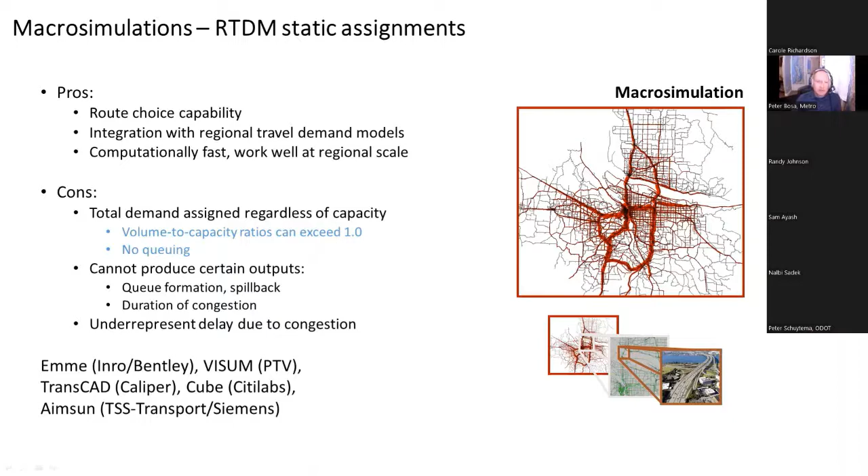I have a list of some of the common tools that are static assignments. At the other end of the spectrum, you have your micro simulations. These are very precise, highly detailed computer simulations. Often the vehicles are almost like agents - they're being modeled individually. They can be assigned specific driver behavior, and they're being simulated in almost real time, so very small fractions, sometimes even sub-second.

They're very time consuming to develop and calibrate. They take a lot of time in order to make sure they're functioning properly. They're computationally very intensive because you're modeling many more single individual objects. The vehicle paths are often fixed - not always, but the traditional application is you get a set of vehicle paths from something like a macro assignment, and then those paths are fed into the micro simulation, turned into individual vehicles, and then it's left up to the operator to determine how to deal with situations in which the demand coming out of your macro assignment might far exceed the capacity capabilities of your facility.

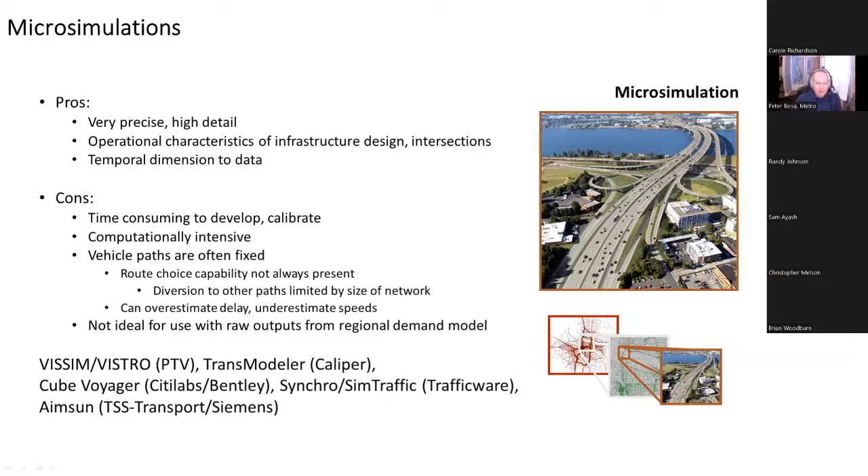So they can sometimes overestimate the amount of congestion on a facility because there's not really that release valve of alternative routes to look at. I'm speaking in generalities here - I know that Chayton would probably raise his hand and say, oh wait, our tool has ways around that, but this is just kind of in general. Then you have this sweet spot, the Goldilocks spot, the meso simulations - dynamic traffic assignment.

There are macro level, macro scale traffic assignments, DTAs. There's some that act more like a micro simulation, but we kind of just group DTA in with this meso simulation description where you're modeling large areas similar to the macro assignments, but you're simulating individual vehicles. There's even some generic behavior associated with some of those vehicles. They're capacity constrained, so you're never going to get a V/C over 1. They do a great job of identifying bottleneck locations and the queues associated with those bottlenecks.

In general, they give us the opportunity to evaluate operational characteristics at a much larger scale than we're used to, operational characteristics of your highway system.

Below is just a list of some of the products that are out there. We've been using Dynameq quite extensively in our region, but I've used all of these other tools listed below, and they all have their advantages. This isn't by any means a judgment call, it's just that we use Dynameq in our region.

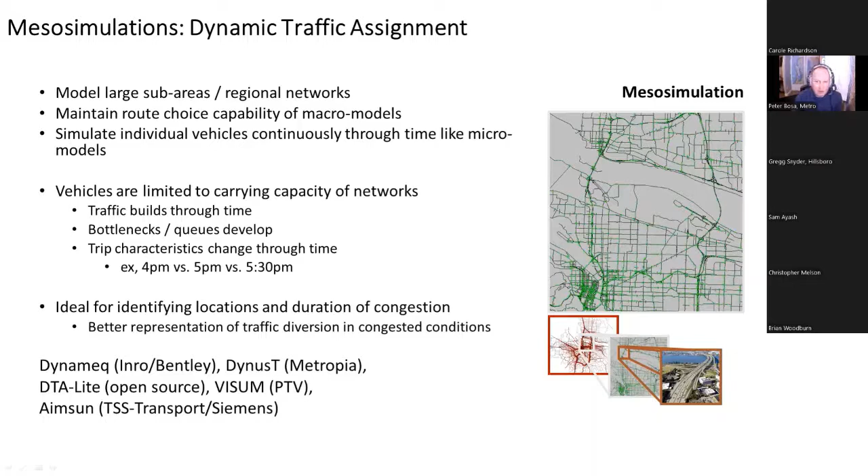We've been actively engaged in DTA development here at Metro for over a decade, since 2010 is when we really got going. We spent a lot of time and resources developing networks, actually all the way down to the lane and intersection level. So when we developed our first networks, we were adamant about getting turn pockets correct, turning movements for lane-to-lane turning movements in intersections, the length of turn bays, as much detail as we could possibly get into our large regional networks. Part of this was because there had been this promise for DTA out there for a long time. It's a tool we've wanted to use.

Unfortunately, until the last maybe 4 or 5 years, I would say that the promise of DTA exceeded the ability of the tools to function in a manner that was conducive to our planning. So basically what I'm trying to say is that the computational runtimes of these DTAs was significant. It didn't make them practical to run at a very large scale.

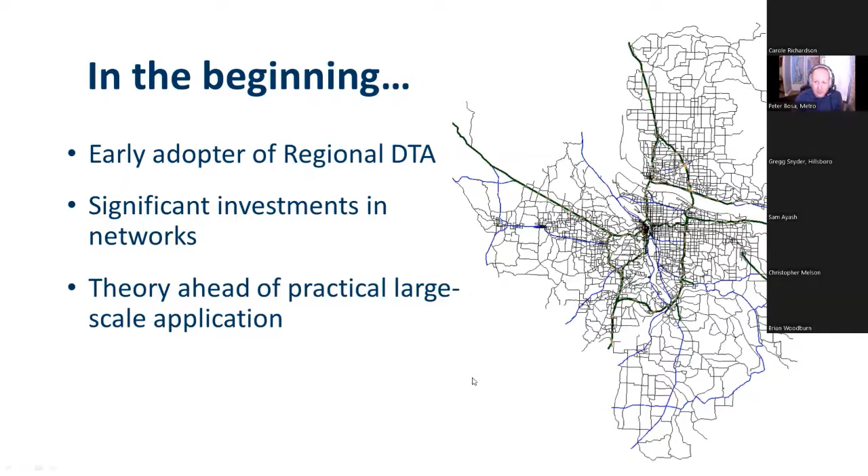There were also some issues behind convergence, and all of that aside, we still found a couple of test cases where we could deploy these tools. The image here shows some of those deployments.

There was, as part of the Barbur study, we actually did a SHRP grant where we looked up... somebody's unmuted real quick.

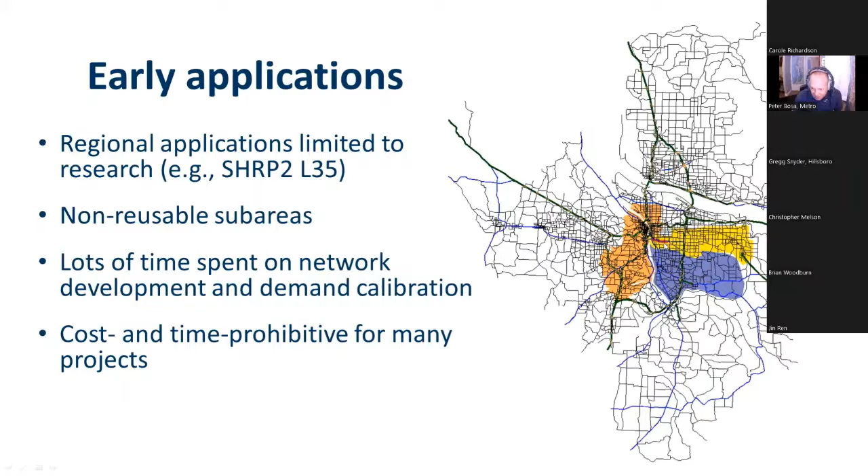And then we did one for, it looks like a rather large area. This was actually, sorry, the yellow one was produced as part of the Division Foster study. And we actually did a PAL study, and you see this little red area here - this was actually the little DTA section that we ended up using, and it was integrated with a micro simulation.

Okay, so over the last couple of years, our developers have been hard at work. They've improved the assignment capability of their tools. There's multi-threaded assignments now. They took some of the more complicated calibration features, like signal optimization, and automated those.

There are methods now for dealing with supersaturated conditions, so even if your demand exceeds capacities, the tools are able to massage it in such a way that they can still reach convergence in a relatively reasonable amount of time. And they have the capability now to scale to much larger areas than before.

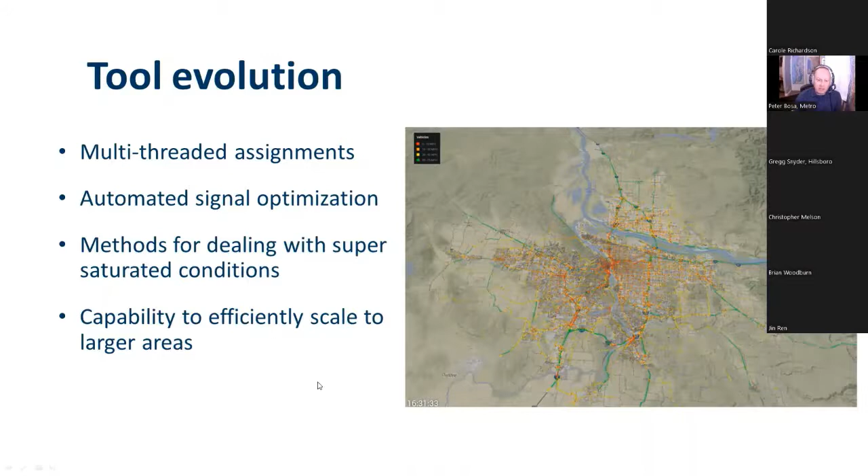So we started a project a few years ago trying to figure out the quickest way that we could deploy a DTA at a large scale. What are the features that are most important for a DTA? We basically came up with this Quick Launch DTA idea with our friends at INRO, the developers of Dynameq. The whole idea was we wanted to simplify, standardize, and economize - basically take advantage of repeated applications of our DTA tools. During this project, what we learned were a couple key takeaways.

One, it should be at the top - ramp meters are really important across all the tools that we've ever tested for DTA. If you want to get your freeways validated well to observable data, you really need your ramp meters in there. They're critical for controlling the flow of traffic onto and off of your freeways.

The presence of signals matters, not a surprise, but the actual timing plans are less important when you're looking at a larger scale.

So generic timing plans seem to work fairly well, and so you don't have to worry about necessarily getting every signal timing plan correct in your model, which is great. And then we also found that turn bays didn't really improve our model validation, at least at a higher level.

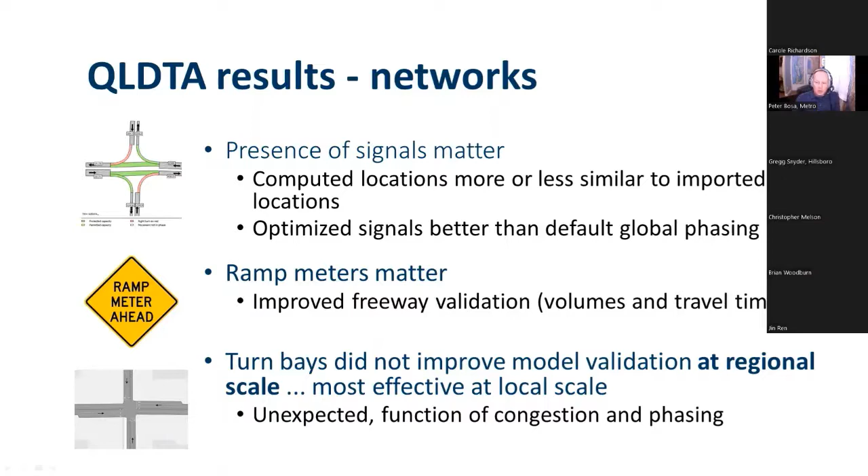We do have lane-to-lane movements in our model. We do have turn bay lengths, but we found that if needed, we could use a tool that basically creates generic turn bays, standardized lengths like 100 feet, determine the locations where they should go, put them in, and that seems to work just as well as having an actual representative, real-life network.

We also did some work around how do we move from our trip-based model, which produces the trip tables that feed the DTA, into the DTA. Our trip-based model is run at the regional level.

We knew that the DTA, the final applications, would tend to be at a sub-regional level. Does it make sense to go from a regional trip-based model to a sub-regional level, taking a sub-area cut of those networks and then moving those into DTA? Or does it make sense to take your regional trip tables, move those to a regional DTA, and then use that to take our sub-area cut?

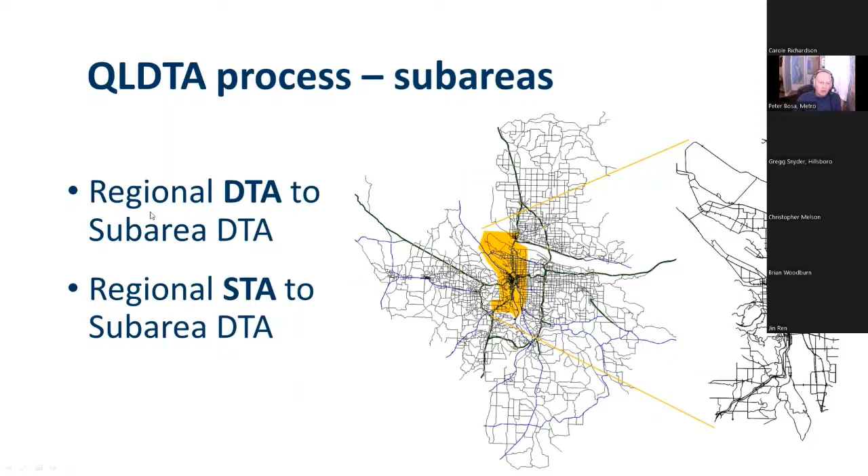We basically landed on the latter: go from the regional DTA to a sub-area DTA, and I'll talk about that here in a second.

So this is an example of an application for the I-205 project. In this project, we start with a regional DTA. We haven't optimized all the signals or anything. We're not too concerned about even validating well at the regional level.

Instead, what we're doing is loading all of our static assignment trip tables onto the regional network, and we're just running it to kind of get a capacity constraint on the demand in the network.

This way, when we do our sub-area cut, we know that the demand feeding into the sub-area won't exceed the carrying capacity of the network, and it helps improve our validation of the sub-area later on. There's an efficiency with reducing the demand to the carrying capacity of your network before you start doing your hardcore calibration and validation.

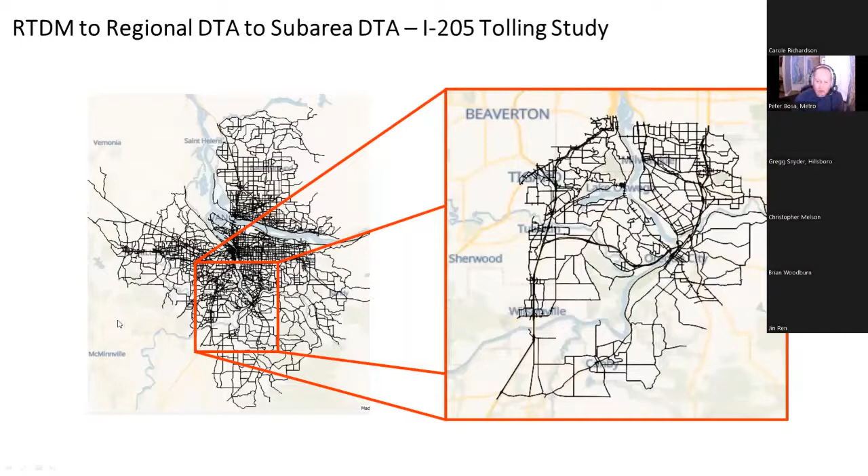So there's a lot of detail in these networks, far more than in our static assignment networks. And this is what I was talking about, all the time that we spent coding those networks at the beginning.

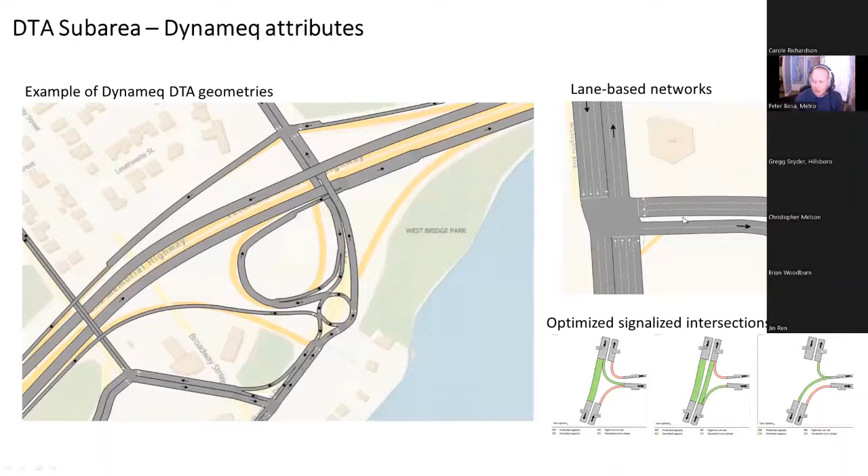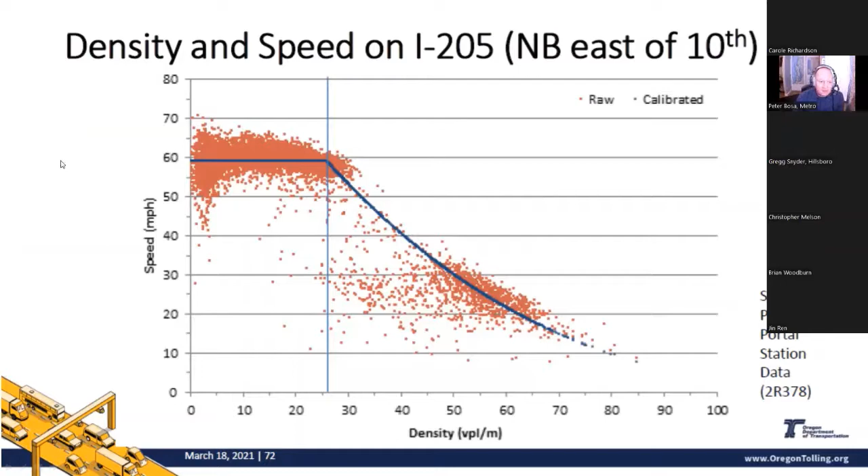Okay, so these next two plots are basically just showing data from the portal on I-205, and it shows the relationship between speed and density on your freeway, and volume and speed and flow rate.

I put these in here because they show what's happening in real life, and they also show what the DTA is doing. So in real life, this is a facility on I-205. As it fills up with traffic, it can maintain a pretty steady speed up into a certain point.

So what's happening here is you're filling up the facility with traffic. Because of that, the congestion is causing friction, slowing vehicles. And as a result, you get less and less vehicles through the corridor.

So that's a primary difference between a DTA or micro simulation and your static assignment. The static assignment would show slowing speeds, but your flow would still increase. It doesn't have this ability to decrease flow as your congestion builds.

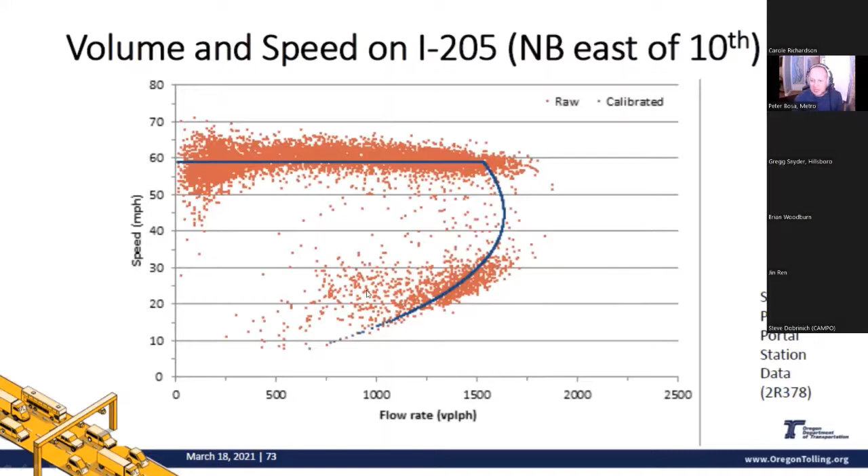So the DTA is basically capturing this: as you reach a critical mass, your flow rate decreases, your speeds decrease, and that gets represented, which we'll see in a little bit.

So here's just some of the characteristics that we tried to validate against. We lifted many of these from the VISSIM protocol that was developed for ODOT, the microsimulation protocol.

Because this is a different tool than microsimulation, we're a bit more relaxed, especially when it comes to some of our GEH and other goodness of fit statistics. But you can see here that we're still trying to go for a pretty good fit, high R squared, low GEHs where possible on counts.

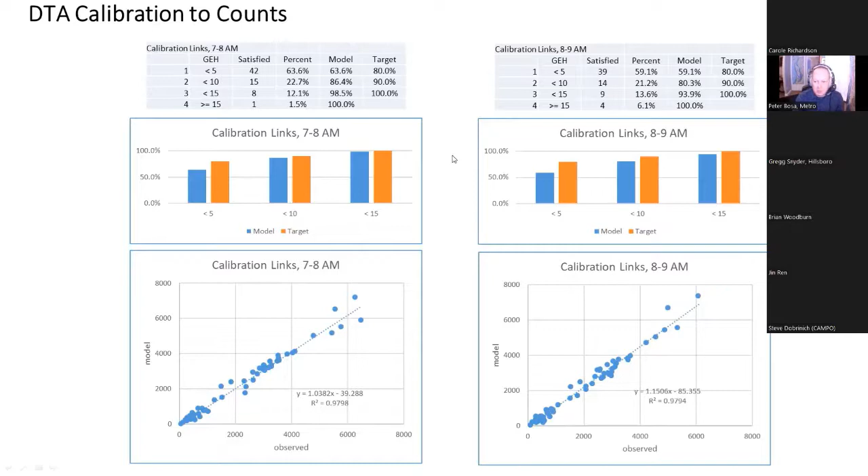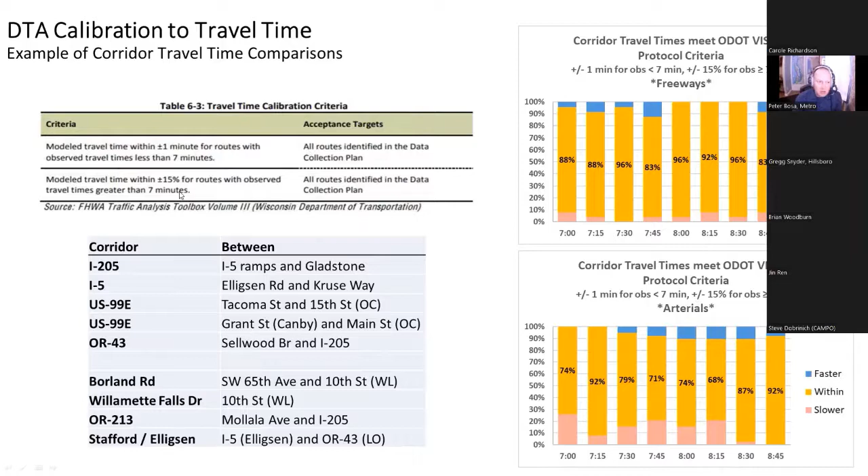The same with the travel time. This is actually something where we can be a bit more in line with the VISSIM protocols, where we look at the travel time calibration criteria that are set out there. So we try to match the travel times within the DTA to that that we've observed with INRIX or HERE data, and we try to fall within the prescribed ranges. So within a minute for travel segments that are 7 minutes or less, and within 15% if it's longer than 7 minutes. Here's an example.

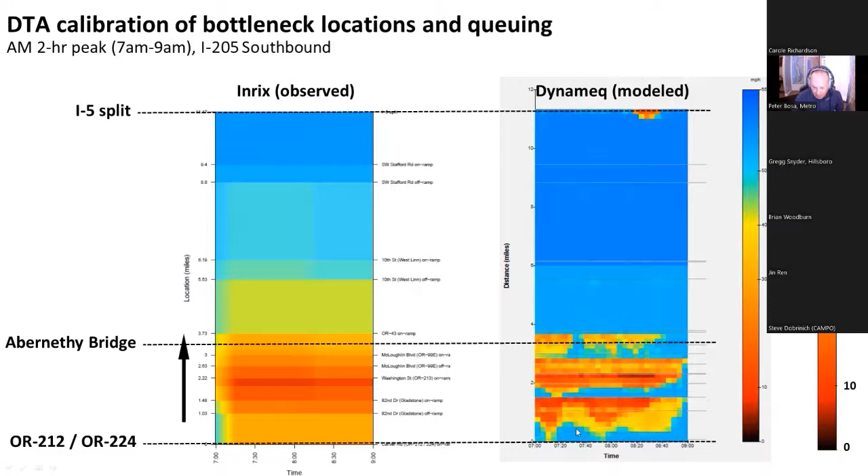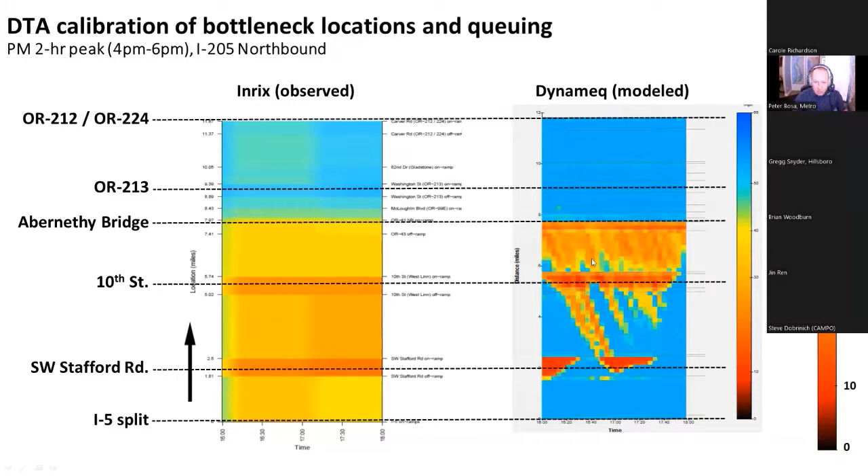We see that here in the dynamic model as well. I think this shows that we've done a pretty good job of calibrating this model so that the bottleneck location is captured, and then the actual shape of the queue spilling back, the extent of the queue, the duration looks very good. This is another example where we feel like the dynamic model is doing the right thing and actually has better resolution than the INRIX data. So the INRIX data is much more general. The dynamic model shows the queue, I think, in higher detail.

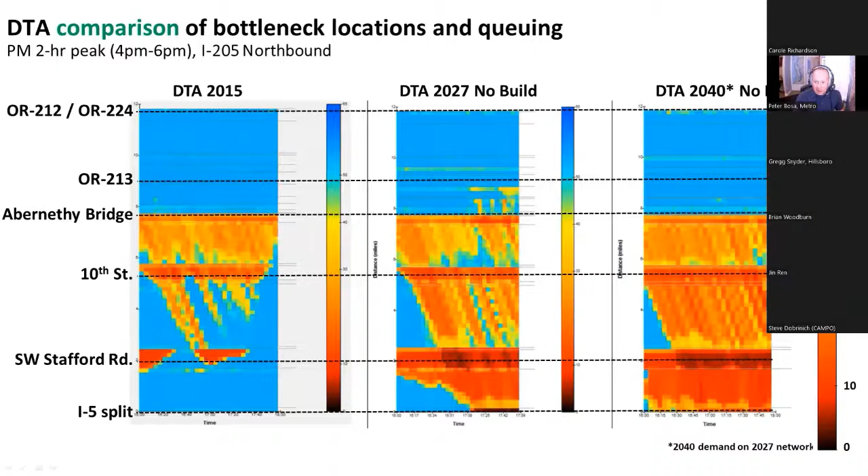And then this is, once you've got your DTA established, you can start doing comparisons. So this is a 2015 base year. We already have congestion at the bridge spilling back in this corridor. By 2027, under a no build scenario, that congestion only gets worse. And by 2040, assuming a no build, we just have complete congestion in this entire corridor.

And here's an example where we have done some analysis with a build scenario. We added capacity in the corridor. As a result, the bottlenecks have been alleviated, and you can see the queuing is gone, free flow speeds through most of the corridor.

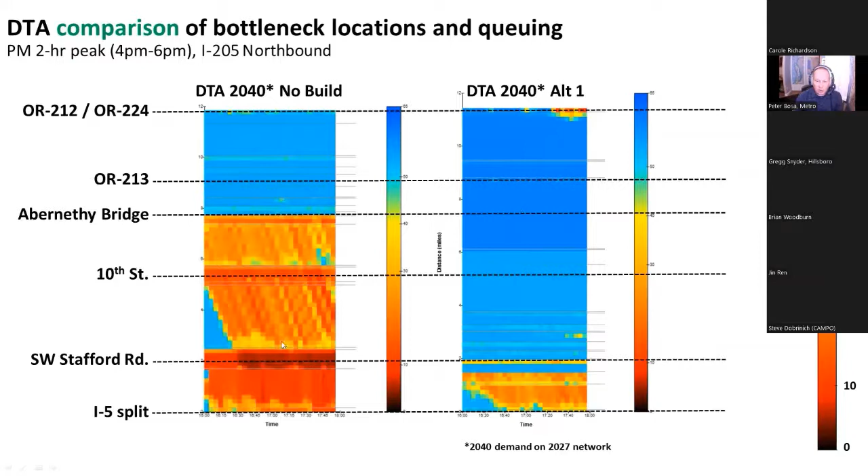So if there's any takeaway, I'm trying to do a time check here. I probably have maybe 5 minutes, 2 minutes.

If there's any takeaway, if somebody asked me, what's the biggest difference between the DTA and your static assignment, I would say that the biggest differences occur not in your scenarios where you've added capacity and alleviated your congestion. It's in the scenarios where you have a lot of congestion. So when you have a lot of congestion, the static assignment will tend to push more vehicles through a corridor and overestimate the speed at which they're traveling.

The DTA, however, is capacity constrained. And so what happens in really congested corridors is you get much less throughput. So in this example, we're getting about 25% less volume through our no build scenario. You can see that our two build scenarios are quite similar between our static assignment and our DTA. And that's because we've added enough capacity that there's no longer bottleneck issues. Both models do a fairly good job of modeling that type of a condition.

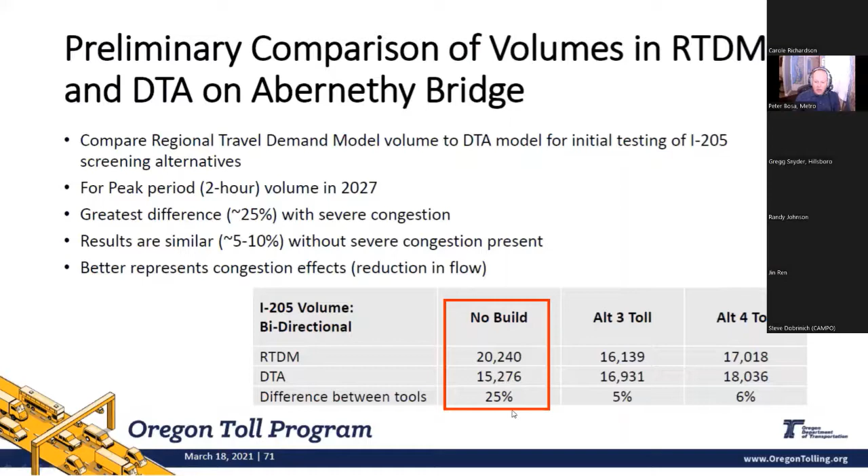But in the highly congested time period, the DTA is more responsive to the congestion. We see much more diversion in our no build at slower times or longer travel times, slower speeds.

Some of our applications in the region, appropriate application, are sub-area and corridor level analysis of just vehicle traffic. So the DTA, while it can have transit vehicles in it, it's not doing an actual transit assignment, meaning there's not people walking to transit stations and boarding on the vehicles and continuing on. So this is a tool right now that's just meant for vehicle traffic.

It's great at studying capacity changes, maybe some operational changes related to signals or metering, and we've been using this tool extensively for looking at pricing in our region. They're great for identifying maybe intersections for mitigation analysis.

They're time period specific, so that is a shortcoming. You have to develop these models for specific time periods, like an AM peak or a PM peak, they're not all day.

Moving into the west side study we have coming up, we'll be looking at potentially ways of using DTA for local air quality analysis. What we have found right now, not practical for full regional implementation. There's no feedback mechanism with the travel demand model, so we're not going to see mode shifts related to the DTA feeding into that. There's no transit component to the DTA.

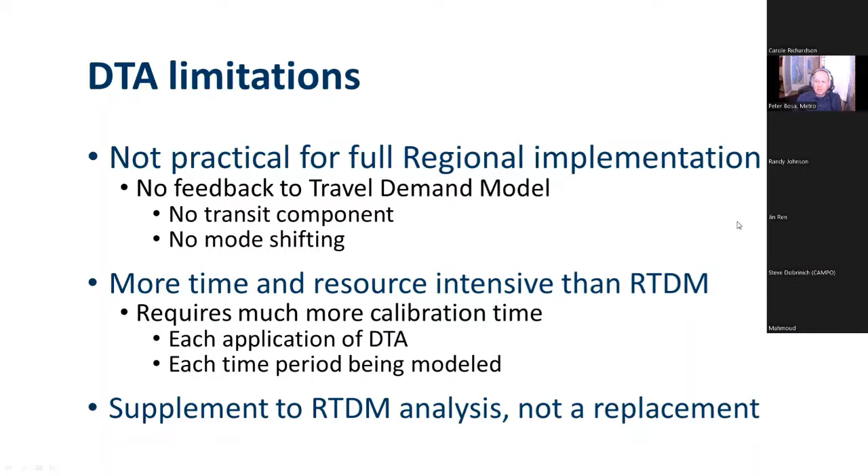And frankly, at the end of the day, this just becomes another tool that supplements the rest of your tools. So this is a tool to supplement our regional travel demand model, not replace it.

A couple of the projects that we're using this on: the I-205 tolling project, looking at pricing, the tolling study, the interstate bridge replacement, RMPP, which is a large pricing project, and then the upcoming West Side Corridor multimodal study, which is US 26.

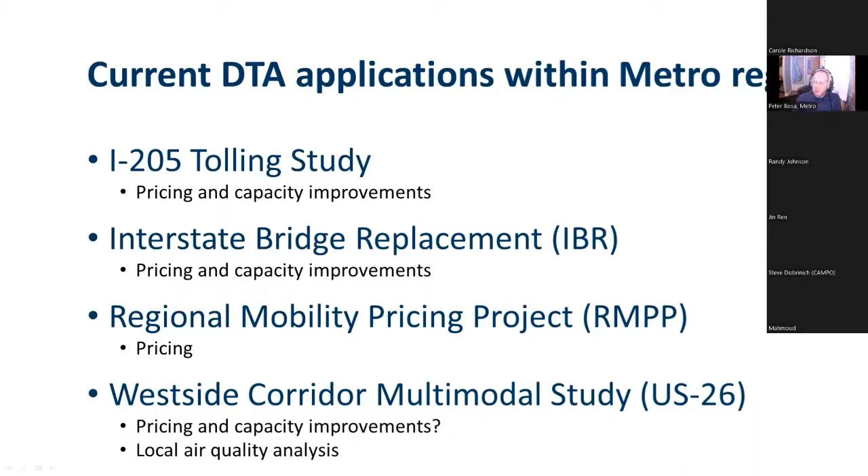I'll take questions if there's time. I apologize if I went over my allotment. No, you're good on time, we have a few minutes.

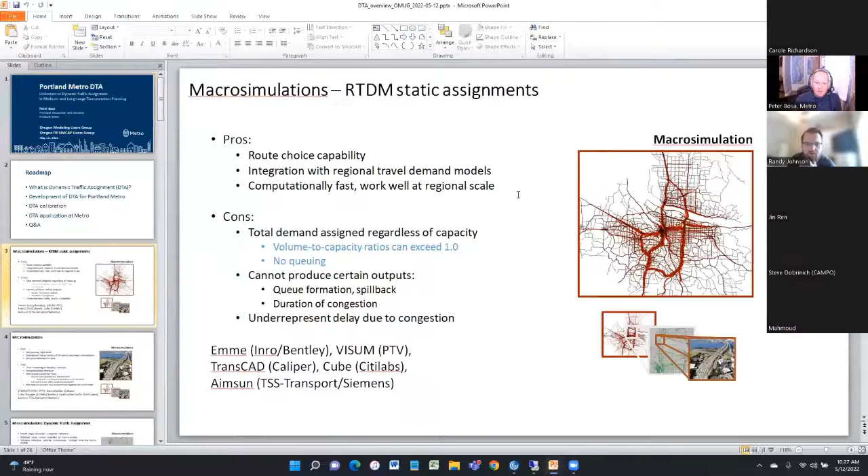Chayton did ask, were the fundamental diagrams for AIMSUN or Dynameq? I'm not quite sure what he meant by fundamental. Everything we've shown here was in Dynameq, if it was model related, it was Dynameq. At least on this, but we haven't done an application with AIMSUN. We've done applications with DynusT, DTA Lite, Dynameq, of course, and I know that Chayton has actually done some applications using VISUM and some of the built-in DTA packages there.

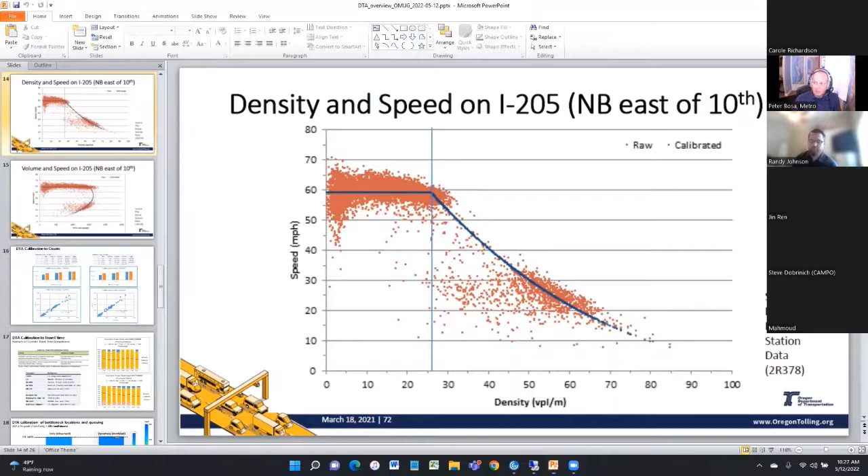Oh okay, the shape of the speed-flow. Yeah, so this actually, I have a spreadsheet - a Peter Bosa spreadsheet that produced this. Yeah, this is great, I love these.

The spreadsheet is excellent because what it allows us to do is look section by section, station by station, and create these models. I've found that the flow rates rarely approach 2,000 vehicles per hour per lane, and that is actually the standard flow rate, or capacity, that we use in our models on our freeways. After creating these plots for enough portal stations, it's safe to say that it's rare you see that type of flow rate in our region. It's led us to maybe reconsider some of the maximum flow rates we'd use, not only in a DTA, but also in our static assignments. I have a spreadsheet that does this stuff - that's a presentation on its own, but it's a very useful tool.

Yeah, I think that's really important, Peter, and it really goes to stress how important local calibration is for these models. Because we have data down in California that some of those freeways are pushing 2,200 plus vehicles per hour per lane. So yeah, we're certainly not getting that capacity here in the Portland metro region.

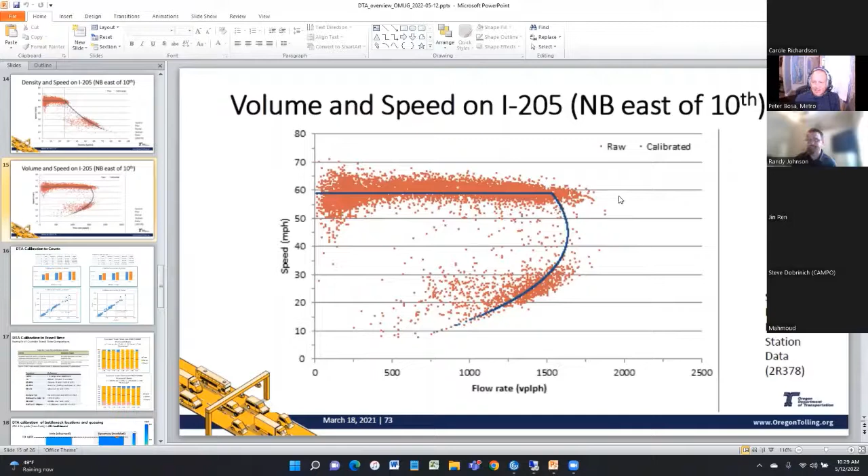Randy, do you think that's like a geometry issue, a facility issue, or is that more like a driver behavior issue? Oh, I think it's a combination of both. Having driven down there, there's definitely a little more aggression in the driving population than up here. They're not Oregon nice like this, right? I should just label this Oregon nice. There you go - lots of space between vehicles.